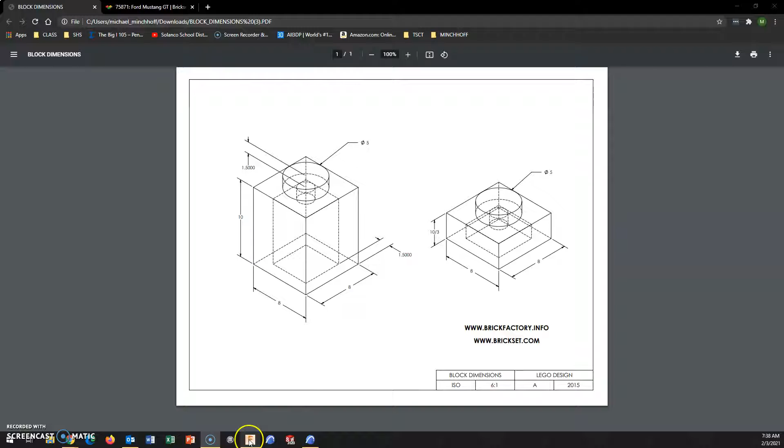By using the shell tool, we can hollow out the bottom with a shell thickness of 1.5. So first off, just getting some settings in here, and we'll start creating some Lego bricks.

So as you start a new design, I would set your default units to millimeters. As you change this, set it to default. That way as you start creating the next brick and so on, you don't have to change that constantly.

So if we start off with an overall dimension of 8 millimeters by 8 millimeters, we are now just going to give this part thickness. We can come back and change this.

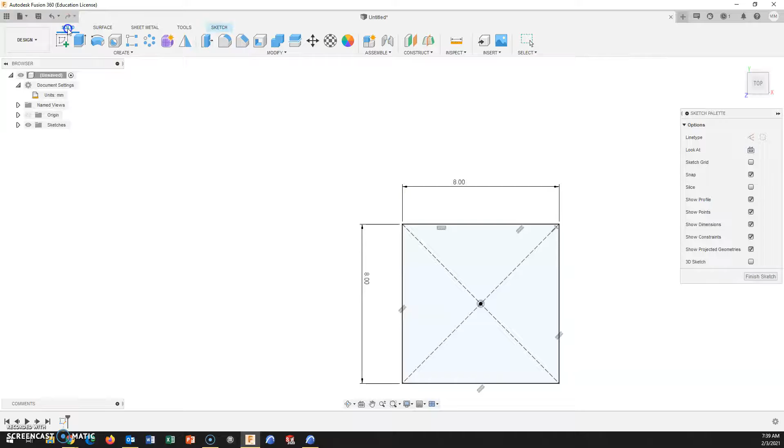I said this in class the other day, work smarter, not harder. We can change the color. We can change the thickness. We don't have to recreate everything. Just save it as a different part.

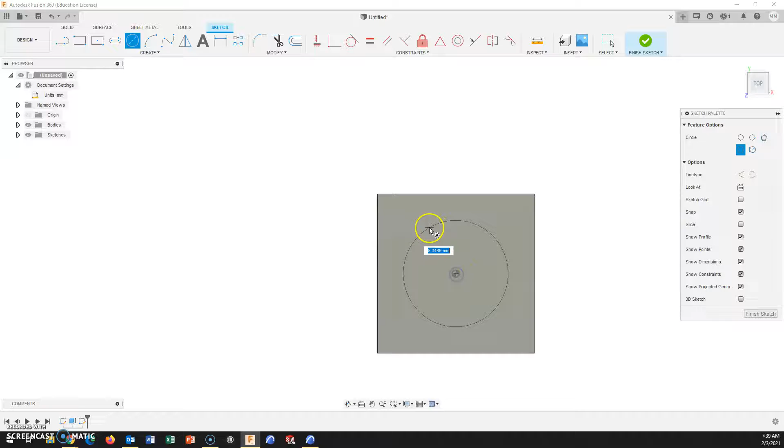Back here to the top view, we'll put the pin on the top, which is a diameter of 5. And this is raised up 1.5 millimeters.

To hollow out the bottom, we have the option for shell in our modify toolbar. If you do not have this, I would highly suggest that you pin this to your toolbar.

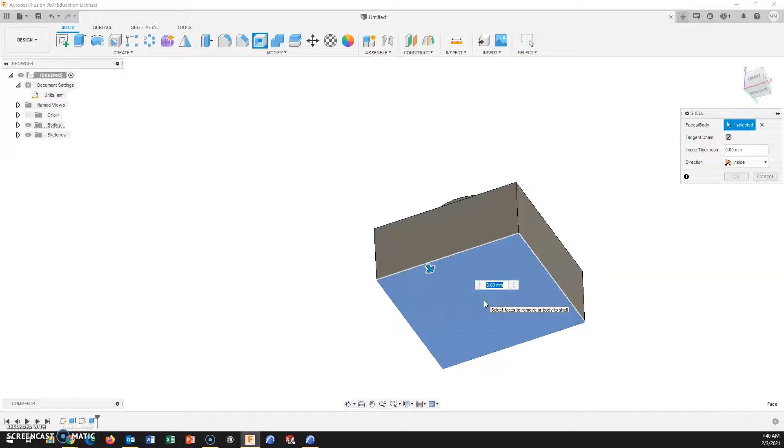By selecting this bottom surface, we are going to create a shell thickness or hollow it out, and that shell thickness is 1.5. This gives us a square here on the bottom that is 1.5, but also the depth is over 1.5.

Sorry, this is 5, so a diameter of 5 pin from another part will go in here. The depth is over 1.5, so as we stack these together, there will be no interferences.

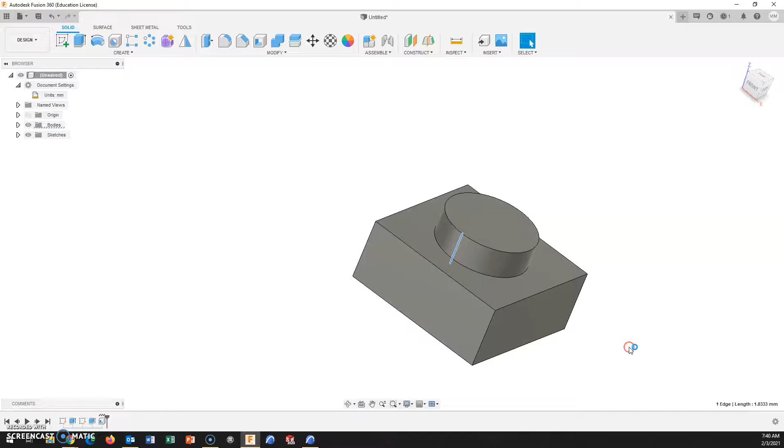In terms of material, ABS plastic is one of your options, and it's not very hard to get to, but I'm just recommending that you add this to your favorites. I already have this in my favorites. I can just drag and drop.

So setting the material, and now setting the color. Plastic colors are fairly limited. I'm going to recommend that you just paint these. Choose the color that you are desiring and set the color.

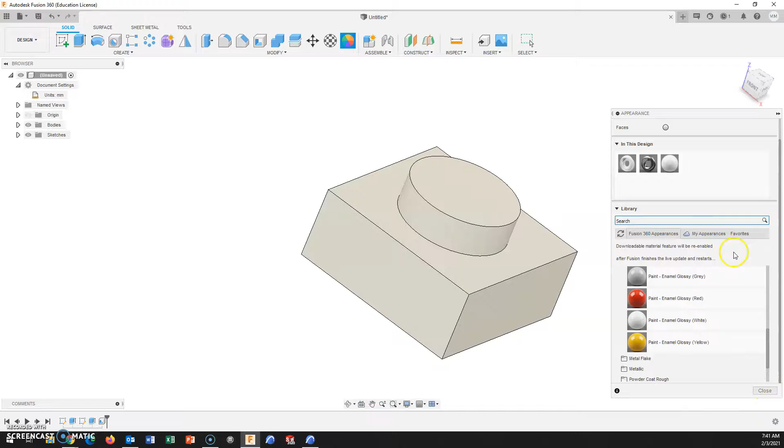It's all or nothing for these Lego bricks. So it should be a full body, and drag and drop the color.

Now, save this as a part you need. If you need to come back and change this, I can change the color. File, save as, a different part.

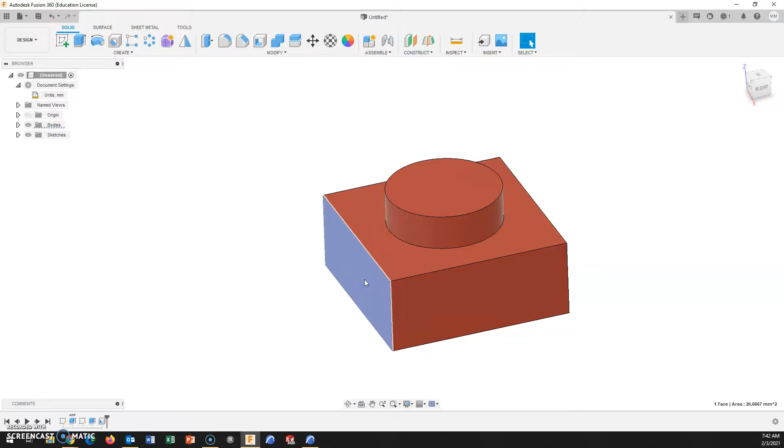If I need to make it taller, this was a feature. So instead of being the thin one, I'm going to make it be the tall one at 10 millimeters. It's still hollow on the bottom.

I could come back and I could change the color, and I could save this as another part. File, save as.

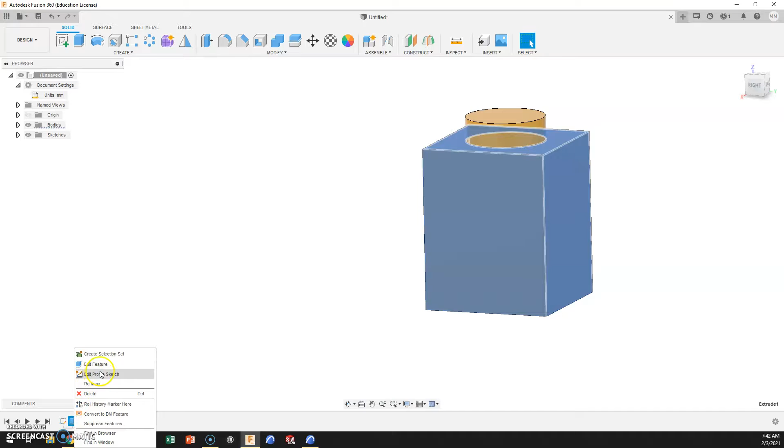I could take this part, I could use this to then create some other part. If I had a part like this, can I go and create, of course I'm not going to have one here, create another part from it? Not with this one. But if I had a part like this, once I create this, I could come back in and add to the side of it to create this from it.

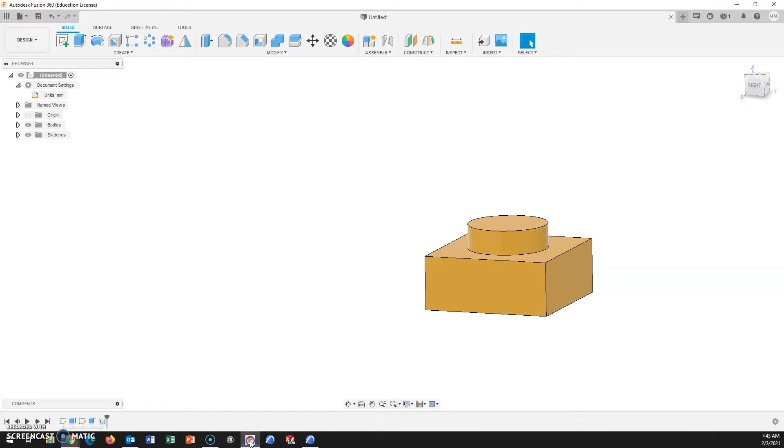Don't start over. So, basic part construction for these Lego bricks.